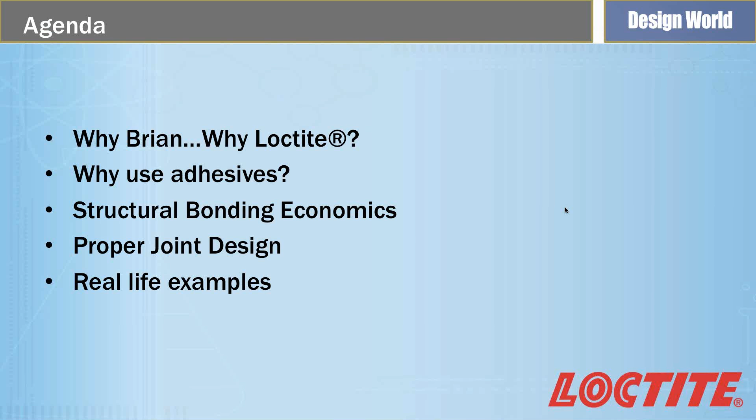So the agenda here: talk a little bit about why you should listen to me when I talk to you, and why Loctite is an excellent partner for structural adhesives. Talk about just in general why you'd want to use adhesives versus mechanical fasteners. We'll talk about structural bonding economics, proper joint design, and then wrap up with some actual real-life examples.

Why Loctite? Loctite, the brand, has been a trusted industry innovator since 1956 when Vernon Krieble developed and patented the first anaerobic thread locker. Since then, we've been on the cutting edge of adhesives, innovating new products like light cure silicones and many things. So we're continuously on the leading edge there. And Henkel is the largest adhesive company in the world. You may have caught me say Henkel earlier, and you see Loctite in the bottom corner. In 1997, Henkel bought out Loctite, the company, and Loctite is now a brand within Henkel, and Henkel is truly the world's largest adhesive company. So you're hearing this advice from the biggest adhesive company in the world, who has continuously come out with the latest and greatest products.

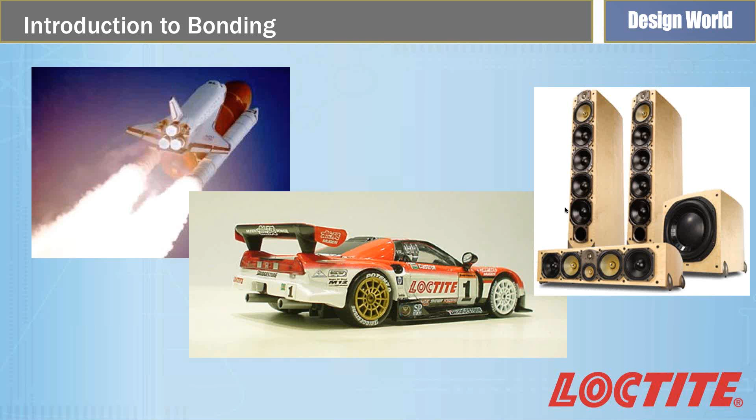In addition to that, adhesives have a level of elasticity, and as parts heat up and cool, as you drive that boom truck from Alaska down to Georgia, there's differences in thermal expansion in the materials that are going to apply stresses to the joint, and adhesives are able to absorb that stress and not degrade over time.

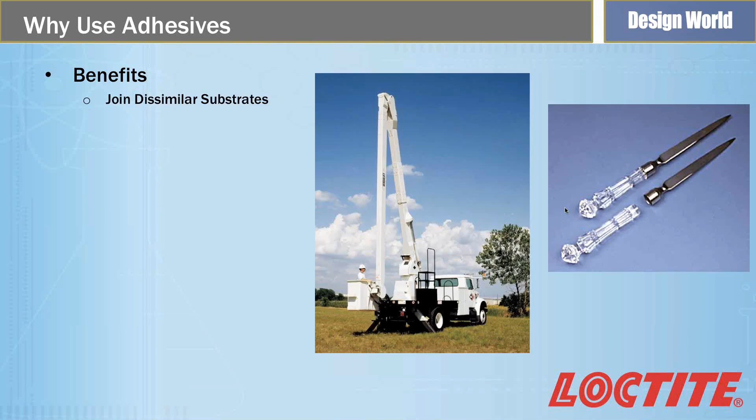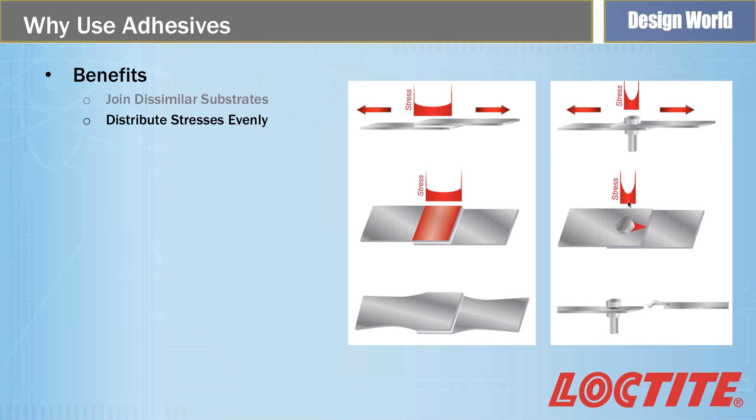We couldn't show it here today, but online there are a couple of videos that we've put together to show you the strength of bonds versus bolts, rivets, and spot welds. You can go onto this website, henkelna.com/loctitestructurals, and view all these videos to see the real-life testing of this distribution of stress.

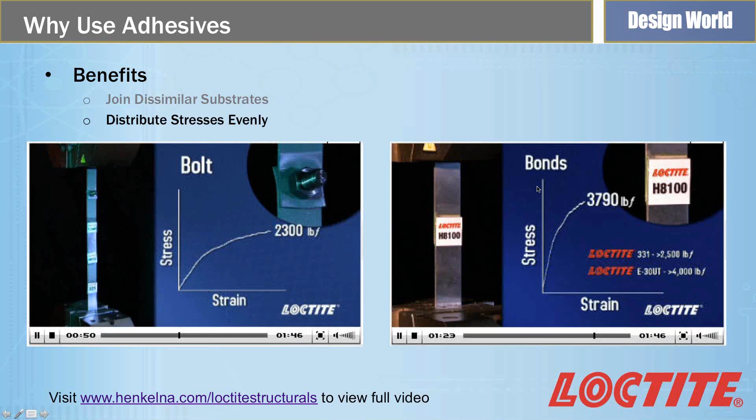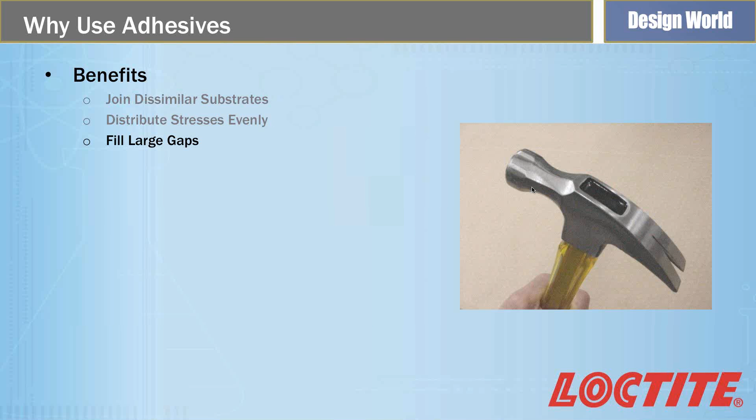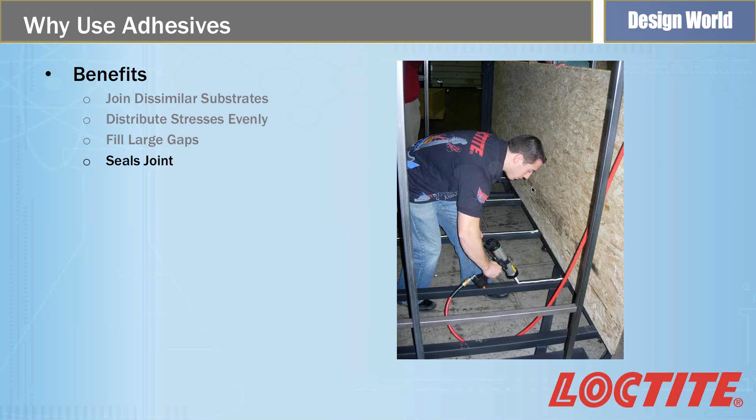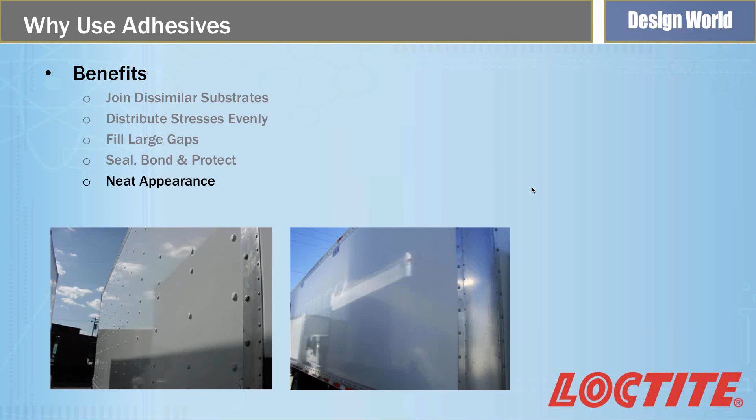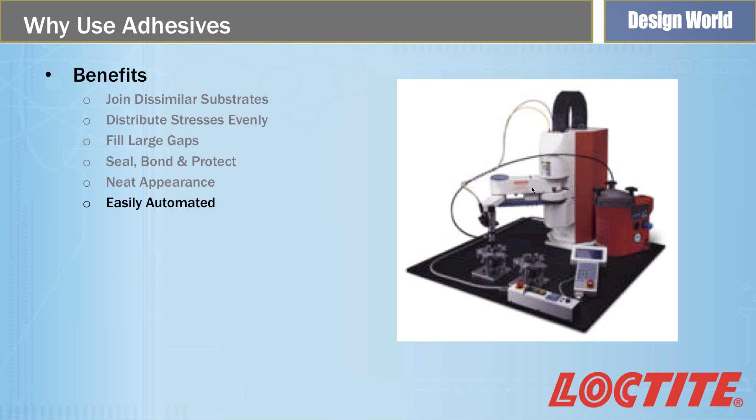So there you go, that's why you would choose adhesives, right? Well, I'm not going to completely ignore the considerations. It'd be easy for me to gloss over this part of the presentation, but I think it's important that we also talk about some of the reasons why you might not use adhesives. If you know these when you're doing your design, you can factor that into your thought process, and hopefully it makes it easier for you. So we'll spend a little time on some of the considerations of adhesives.

For one thing, they have to be cured. If you're welding or screwing or riveting, you just do it and it's done. Adhesives need to be cured, and that involves some type of process. On the top is a conveyor - some adhesives are light cured, and you have to spend money to buy this type of equipment and a process to get the part through there to cure it. On the bottom, we're showing a two-part adhesive, like an epoxy, where the parts are statically mixed through a mix nozzle and onto the part. So in some way, shape, or form, you're going to have to pick a curing method to make the adhesive cure on your part and give you the strength that you want.

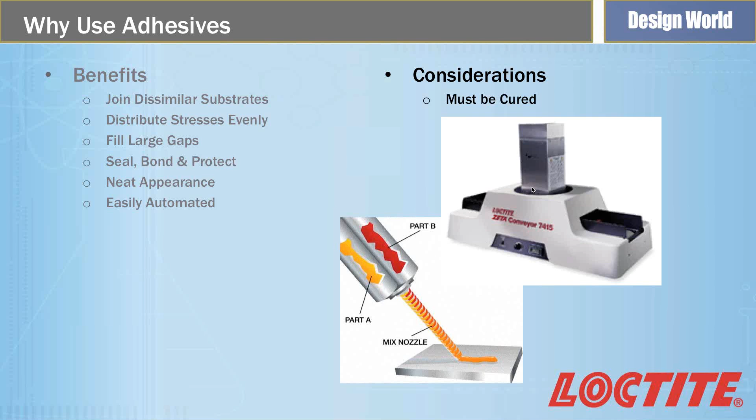That's one consideration. Kind of directly related to that is fixture time. All these adhesives are going to take a certain amount of time to fixture. In the case of light cure, it might be a matter of seconds. In the case of a two-part product that statically mixes, that might give you a matter of minutes for fixture time. But in either case, it's going to be some amount of time you have to let the product cure before you can pass it on in your assembly process. That's really one of the major considerations and differentiations between mechanical fastening methods and adhesives - fixture time.

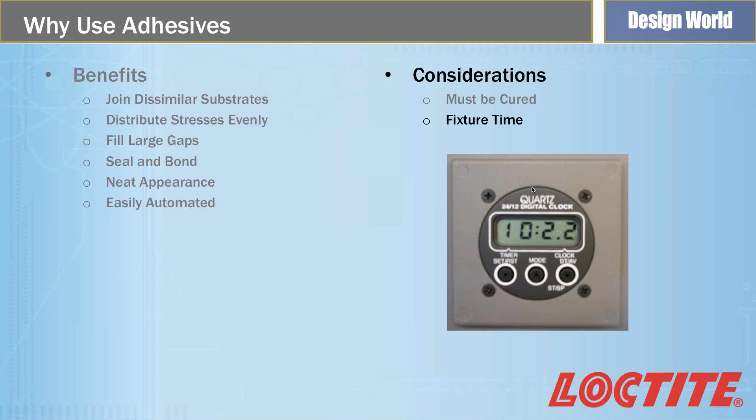Adhesives can be messy. If you knock over a box of bolts on your assembly floor, you can pick them up - it's real easy. If you spill adhesives on the floor, it's liquid, so you're going to have a mess. Now, there's clearly things you can do, like automating the assembly and making sure you have the right processes in place, but it is a consideration that adhesives can provide a messy work environment if not handled properly.

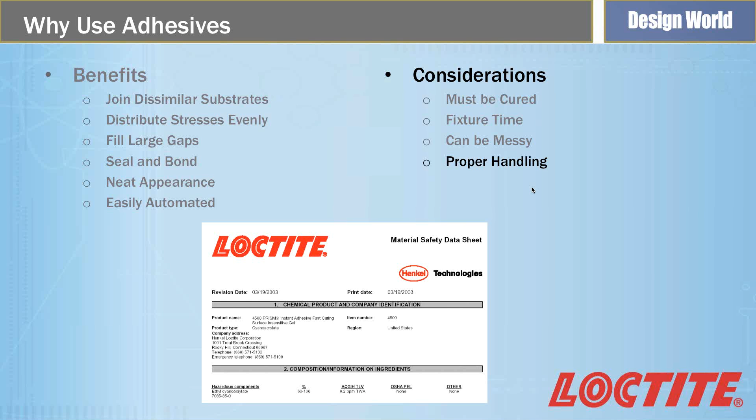And then to that point, proper handling. If it's the first adhesive you bring into your plant, or even the 50th, you're going to need to have the proper documentation in place and the proper training for your employees. This is something any adhesive supplier can provide you, but it is a consideration - you have to make sure that people know what they're using and are using it properly.

And lastly is my favorite one. I gave you the example of the trade show where I'm talking to this person, and we're talking for 10 or 15 minutes of me trying to convince them that structural adhesives are going to work - it's going to be super strong, it's going to last forever, it's going to be great. And then once I finally convince them, you know what their next question is? How do I get it apart? And obviously there are certain times when that is important. If there's a certain part of an assembly you have to get to for warranty work or replacement parts, this could be a potential consideration, and there are ways to do it.

Some elastomeric adhesives, like what your car windshield is bonded in with, you can use piano wire and cut it out with that. And even epoxies and acrylics, thermoset plastics, you can get those apart with heat. But it is a consideration - if you need to get it apart, you need to be picking a proper adhesive up front that's going to allow you to be able to do that.

So those are the major benefits and considerations to why using an adhesive. I probably could have done this all with one slide, because at the end of the day, from my experience working with different customers, you can spend all the time you want proving that adhesives are much, much stronger and all these different things.

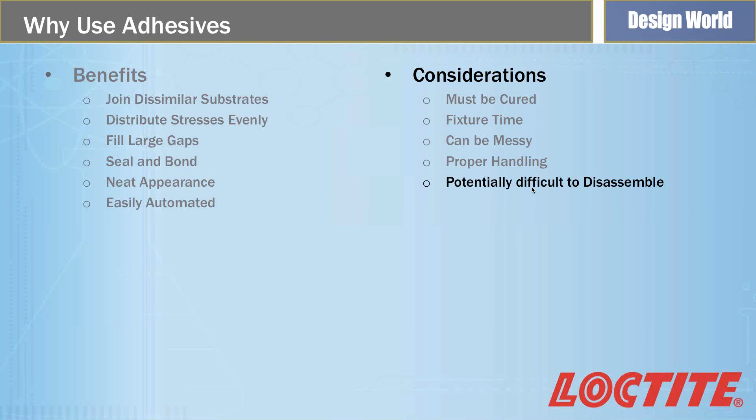But really what it all comes down to is saving money. At the end of the day, switching to structural adhesives is going to have to put more dollars in your pocket if you're going to do it. And the three major ways that's going to happen: either improve performance, they're going to distribute that load and give you a stronger final assembly, which is going to help you reduce scrap or warranty claims, and help you make more money.

It's going to be a faster process. It's going to reduce secondary operations that have to do with welding or other things. That's going to increase your throughput, so you're going to be able to sell more of what you make, or it's going to help you decrease your labor cost. So at the end of the day, the economics all come down to one thing: helping you save money.

So when we're looking at other methods, I've kind of divided it down to these three: you've got welding, you've got riveting, and fastening with nuts and bolts. And another thing I would throw in here too is like a double-sided adhesive tape. The major differentiator here, like I've talked about, would be fixture time. When you're welding, riveting, fastening, or using double-sided tape, you've got instant fixture.

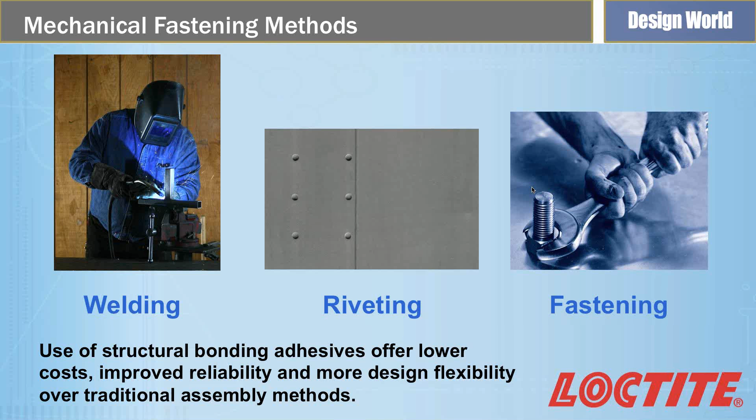And so that's a great thing in your manufacturing process. But there are some considerations. So I want to spend a little bit of time looking at these things side by side and the pros and the cons.

So when you talk about welding, the major pro is it's very, very strong. And if you're doing an overlap weld on a part, that is the strongest thing you can do. We've done a lot of testing, I'll show you some data later in this presentation about lap shear strength. And if you've read our white paper, you've already seen it. But if you're doing overlap welding, that is the strongest thing you can do.

There are some considerations with it. It's labor intensive. And I say that based on the fact that yeah, it takes a lot of time to do a weld, but it's also costly labor. Welding labor is in high demand. It's a very specialized skill, and they make a good living at what they do.

So it's expensive labor to do. In many cases, it distorts the substrate. In some applications this may not be a big deal, but on others, like at the stovetop we'll talk about later, there are actually secondary operations where people have to come back and grind the part, smooth it out, and those add cost and time to the operation. So that's something to consider.

We already talked about how you can't weld dissimilar metals, and also galvanic corrosion can occur in welded joints.

Mechanical fasteners, again, they're instant to develop your strength, and it's a well-known method. Between mechanical fasteners like rivets and screws and welds, this is what we were all taught in school. If you're a mechanical engineer, you spent a lot of your time learning how to design with these methods. I know I went to school to be an engineer, and I never once learned about adhesives. So these are very comfortable methods to work with, and they provide you instant strength.

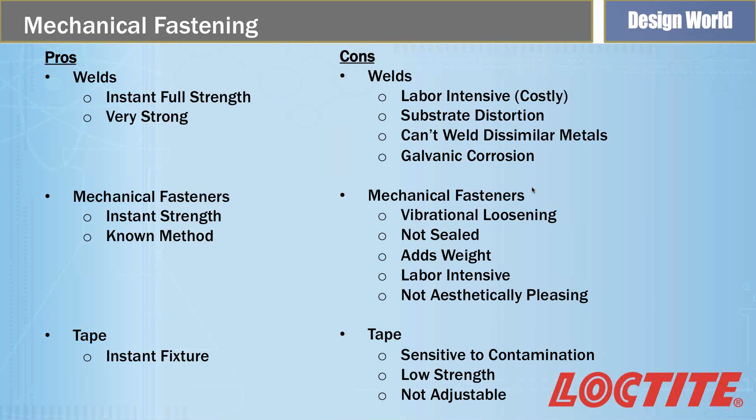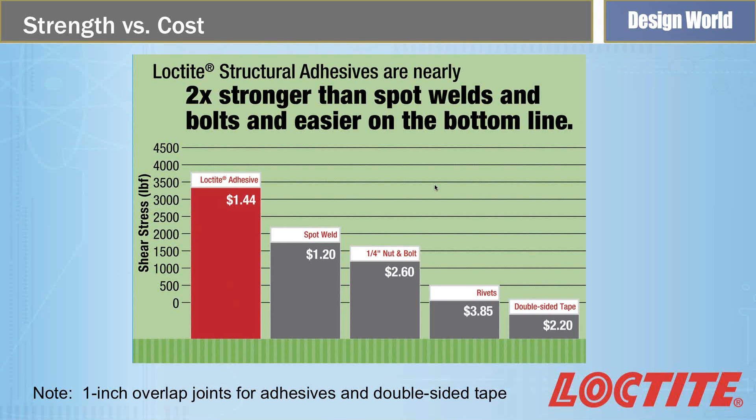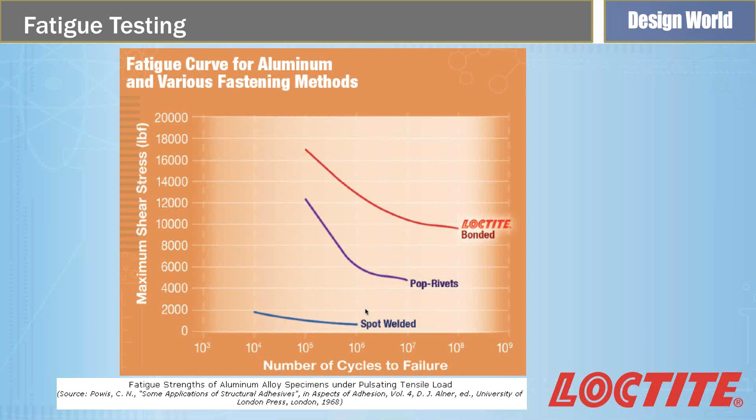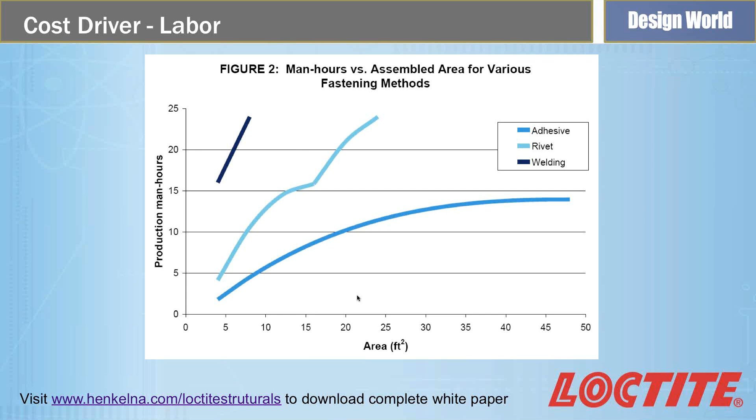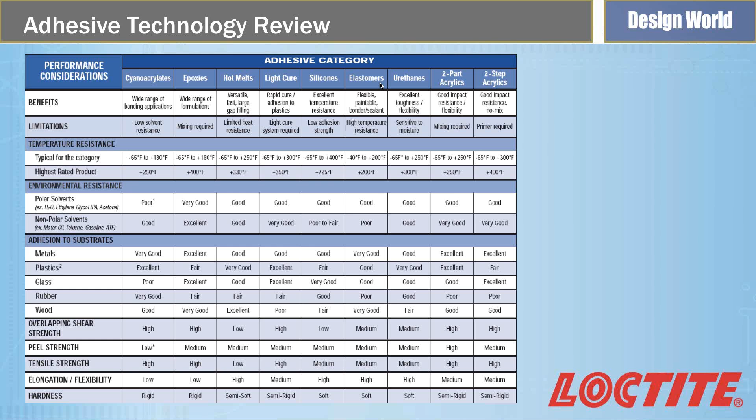So this is here to represent all the adhesive chemistries that are out there. When it comes down to it, there are really three major ones that we would consider structural: epoxies, two-part, and two-step acrylics. These are the chemistries that, for the most part, are giving you 3,000 to 5,000 psi of shear strength on steel, stainless steel, and aluminum. These are the ones that are going to be a direct replacement for welds and rivets and give you that great ultimate strength.

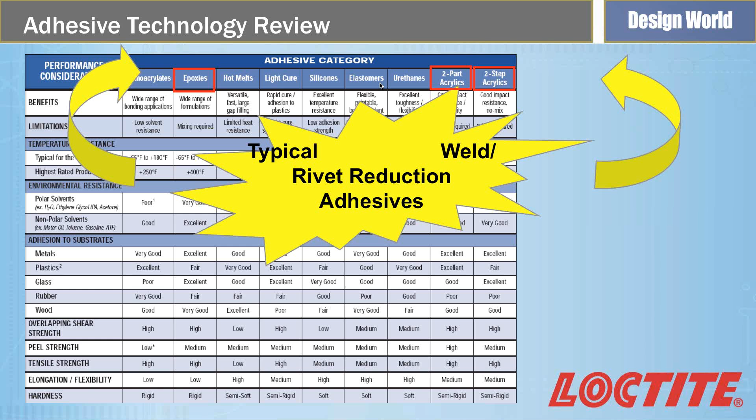The only other thing I'd add is that, depending on your application, some of these other chemistries can be structural adhesives too. Depending on the needs of your application, an elastomer or even a superglue might provide enough strength to be the only thing holding your part together. That's really how I would describe a structural adhesive - it's what I'm relying on to structurally hold my part together. So while these three are the ones you probably want to start with, any one of these can be a structural adhesive depending on your application.

I could have spent a lot of time talking about what makes those chemistries work and the chemistry behind them, but at the end of the day, that's our job - that's the adhesive manufacturer's job, to give you the right products to work for your assembly. You need to tell us what it is you're trying to do and what constraints you're working with. If you're interested, we could certainly come out and give you a much more in-depth look at the chemistry, but that's all I'm going to cover today.

The next thing I want to talk about briefly is joint design. This is probably a pretty basic review, but then I'm going to get into a little bit of what happens when you apply an adhesive force.

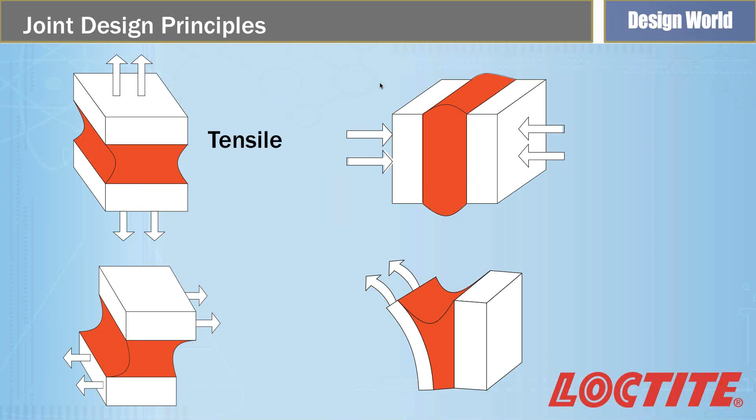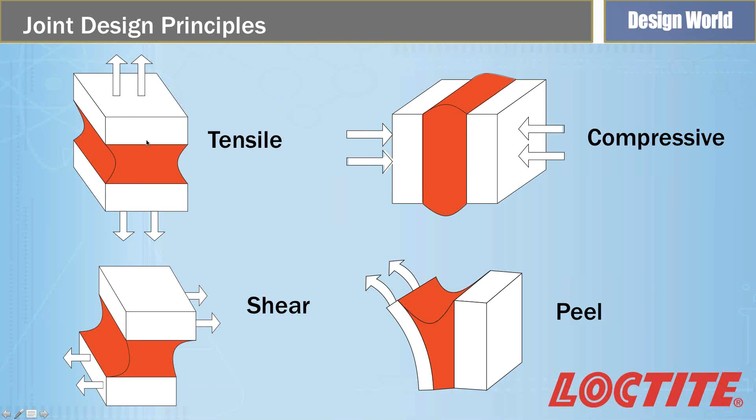The four major types of forces you can put on a joint are tensile, compressive, shear, and peel or cleavage. In these examples, the white is a block of substrate, like a metal, and the red is the adhesive - that'll be consistent as we go through. So these are the four major designs you can have, and we'll talk a little bit about what happens.

So if you're applying tensile strength, again, this white is the substrate, this red is the adhesive, and these arrows represent the force you're applying.

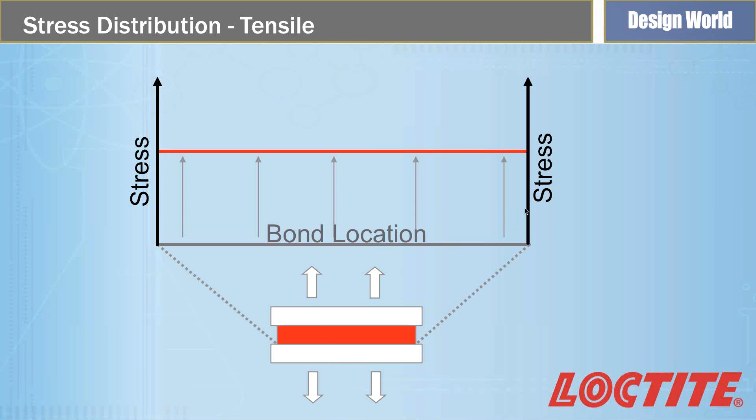So if you're applying a tensile strength across this entire bond area, which is blown up on top here, the stress is distributed completely evenly across the entire assembly. So this is an excellent force to design into your assembly in order to maximize the strength you can achieve with adhesives. Same thing with compression.

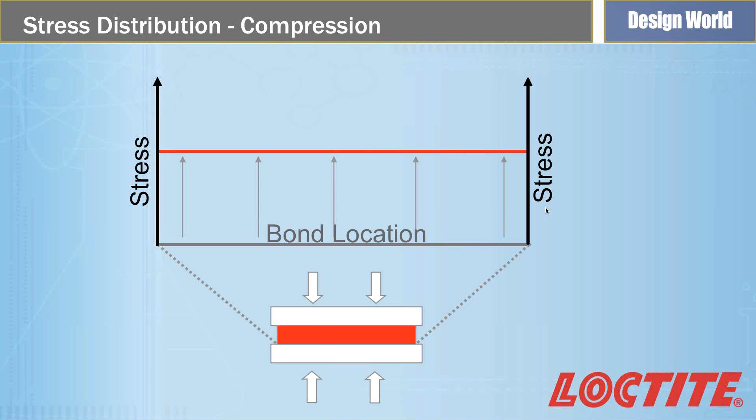Compression is actually even better. It's rare, you'll rarely ever see an adhesive fail in compression. So when possible, these are things you want to try and maximize in your design in order to increase your effectiveness. Shear strength is probably the next one.

So this is the next most aggressive stress, let's say, because you've created those slight stress concentrations at the leading edge. But there's things you can do, like increasing the width of your bond line that the force is applied to, in order to maximize the ultimate strength.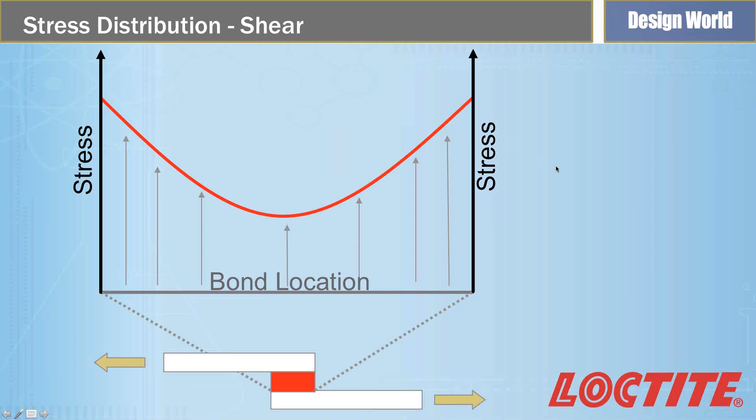And here's a little bit of why that happens. This is kind of an old graphic, not as nice as the other ones, but I think it really speaks to the point. In this case, this top set of rectangles is the substrate, this one in the middle is the adhesive, and this one on the bottom is the substrate again. So as you apply that shear force, you can see the adhesive starts to move.

And actually, if you look at this under very high-powered and close filming under an actual Instron, or when you're mechanically testing it, you'll actually see this little bit of substrate distortion happen, and that creates not a true distribution of stress. So in a perfect world, if that little distortion didn't happen, you probably would have perfect distribution of stress. Because it does, you get that concentrating at the leading edges, and this is why.

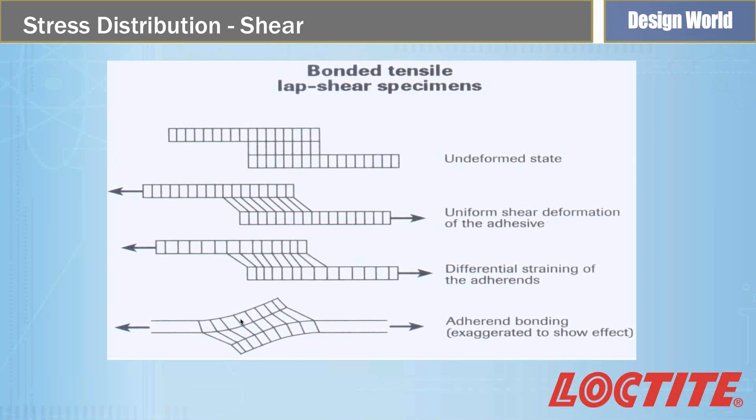Lastly is a peel or cleavage force, and this is really where you're pulling up one side and holding the other constant. The only difference between peel and cleavage is whether or not your substrates are rigid. If it's rigid, you have cleavage. If it's flexible, you have peel.

And the takeaway here is you don't want these. These are the most aggressive forces you can put on an adhesive because you have concentrated all the stress on that leading edge of the joint. And when it starts to fail, it just keeps moving its way down the end. So you definitely want to try and avoid cleavage and peel in your design if you can.

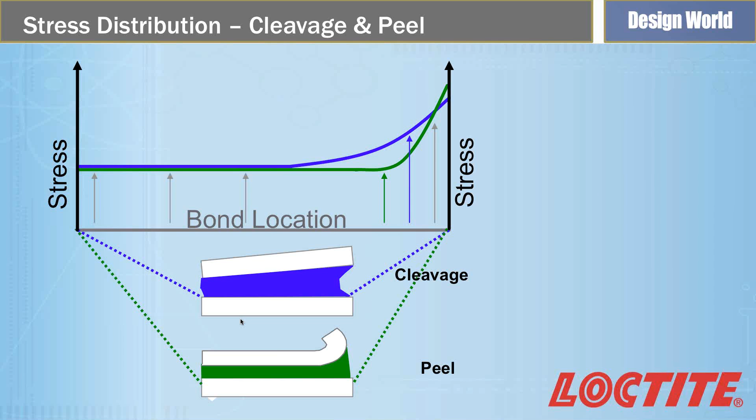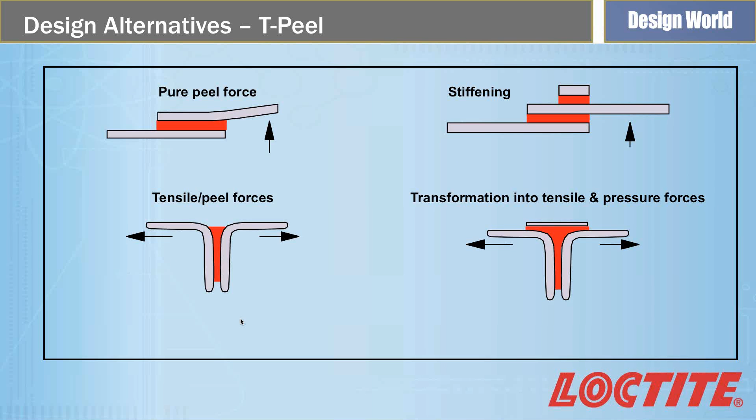So there's ways to do it. I've provided you guys with a couple of pretty simple design alternatives for shear here, and again for peel here. And these are just different ways you can design out some of these considerations if you have them. And again, you'll get a copy of this presentation, so no need to furiously jot all this down.

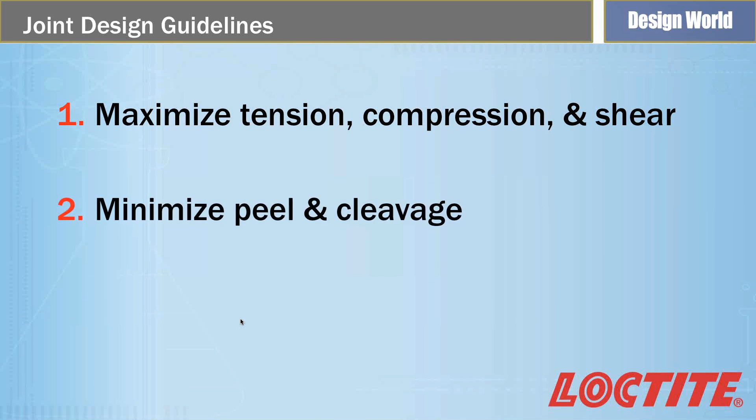So in summary, for joint design, you want to maximize tension, compression, and shear. Those are the ones that are going to give you the most ultimate strength out of your assembly. You want to minimize your peel and cleavage. That's focusing the stress on one point, and you're losing that benefit of the adhesive to be able to distribute the stress evenly.

And lastly, you want to increase your bond area. And remember, wider is better. Any way you can increase the bond area is going to help, but if you know the direction your stress is going to come from, if you can make that leading edge wider, it's going to give you a stronger ultimate assembly than if you make it longer. So those are the three major joint design guidelines when working with adhesives.

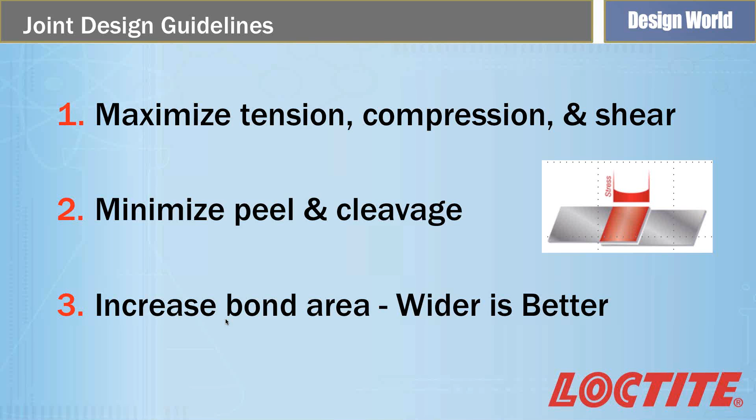So that's really all I had for joint design. And now I wanted to cover a couple of real-life examples. So basically, up front we talked about why adhesives. Then we covered some of the cost benefits and why they're going to save you money. We talked a little bit about joint design, and now this is really the, hey, here are the people who are actually doing this today. So this is meant to hopefully instill in you a little bit of confidence that I'm not on the leading edge of this cusp. People have been doing this for years, which they have.

These are a couple specific examples that I've handpicked for us to talk about today. The first one is the automotive impact test, used by one of the big three automakers to validate assembly methods specific to pillars, like your A-frame pillar and things like that.

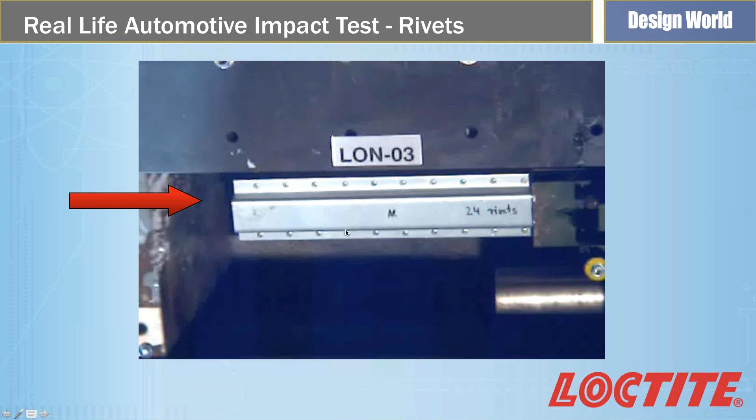This is not good. Basically, the rivets are popping out, so the assembly is no longer held together, and the failure mode is this very critical and acute bend of the part—it's not really absorbing the stress. Most of the stress is coming through into the back end, which is not what you want in a car crumple-type application. So this was their riveted panel.

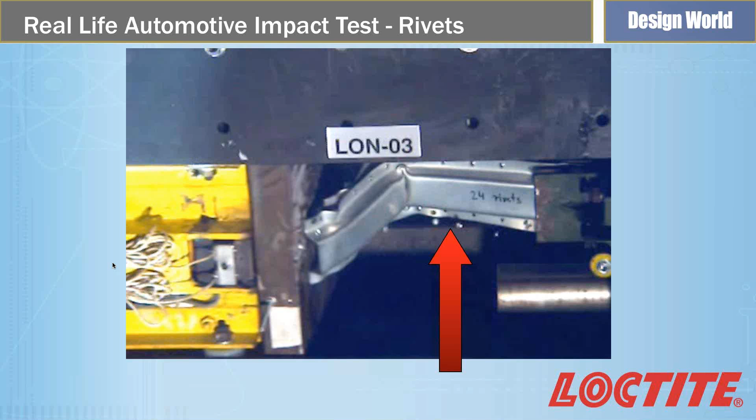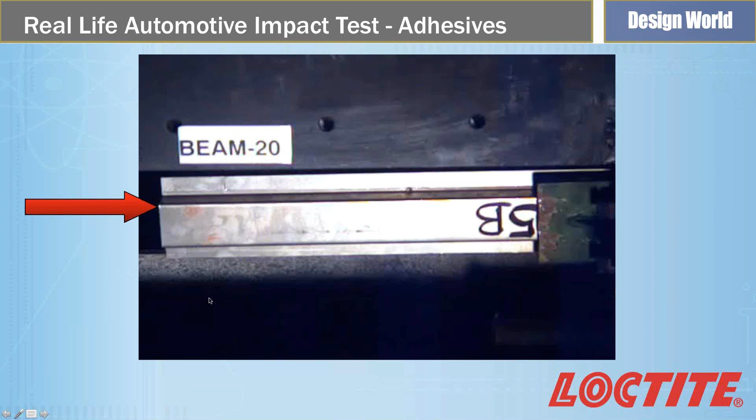The next one you're going to see is an adhesive bonded one. Same kind of application, except now these are bonded together with an epoxy—a heavily modified epoxy with very good impact resistance. Again, you'll see stress applied with an impact from the left-hand side, and we'll show you what happens. In this case, the adhesive joint is still staying together.

It hasn't failed, and what it's doing is crumpling—this is what creates that crumpling in the front of a car. The adhesive is absorbing that load and folding in on itself, due to the properties of the adhesive being able to absorb the load instead of concentrating it at rivets that pop out. This is one of the reasons why almost every car has a lot of adhesives in it—because of the major benefit of structural adhesives absorbing that impact load.

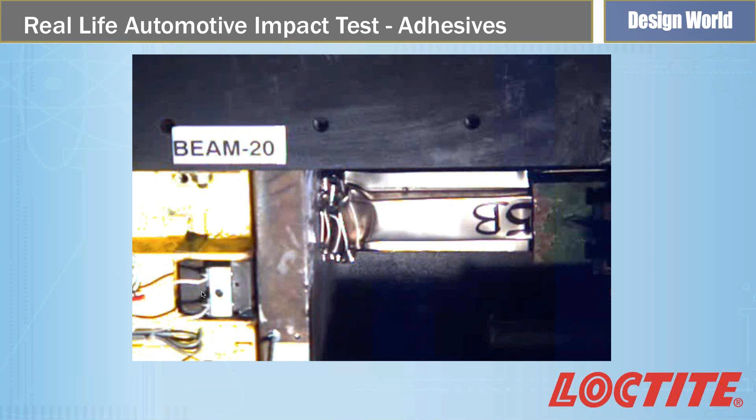Sticking with the automotive example but a little less abstract, here is a real-life application for Thomas Built Buses. We have agreement with them to share this story because it's a good thing for them—they actually have the safest school bus on the road, thanks to Henkel Loctite structural adhesives. These pictures are taken from an SAE case history that appeared in their magazine. Basically, they've eliminated the rivets that used to hold this assembly together, and are now using structural adhesive.

On the bottom, you can see it—this gray product that's hard to see because it's designed to match the frame itself, so squeeze-out on the inside doesn't show up as dramatically. The number one driver—decision drivers, not bus drivers—to make the switch was improved safety.

You saw in that first example all those rivets popping free, right? Picture this school bus with a bunch of people inside. If there was an impact and the substrate ripped like those rivets did and they came loose, that creates a safety hazard on the inside of the bus. So by bonding it, when you have an impact, the actual joints stay together—the metal bends and folds, but it does not break free from where it is bonded.

So you have this initial impact that's going to create something you don't want, but you're not going to compound that problem by having the substrate fail where these rivets and stresses are concentrated. That's why, by safety standards in North America, this is the safest bus out there. If you look at the next school bus you see go by, you might see that it's glued together—and that's the main reason why.

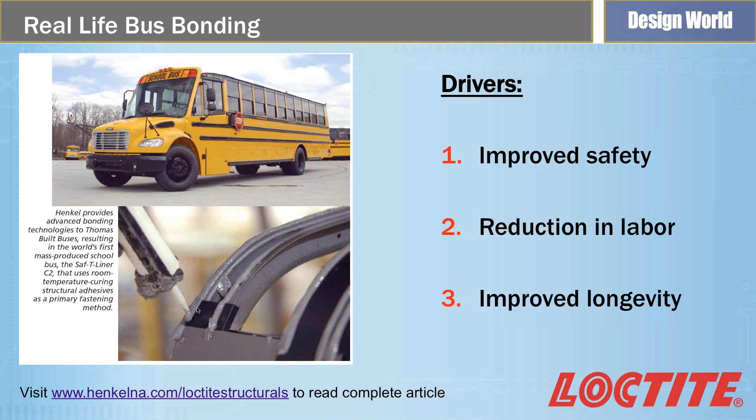The next thing is trailer bonding. In this case, on the bottom here, you see a Loctite trailer. We actually built this trailer, partnered with a manufacturer in New York, and built it all out of Loctite adhesive. There's no screws or fasteners on this thing, it's all glued together with Loctite products.

In this market, while some people might consider their Harley-Davidsons or their ATVs their kids or their toys, and might consider safety a big deal, the major driver for these guys is reduced labor cost. This is a highly cost-competitive market.

Being able to draw an adhesive bead, like you see this gentleman in the top left-hand corner doing, across that area in a fraction of the time it would have taken him to put in all the bolts, screws, and rivets, is the major reason why many of these guys have switched to adhesives. That also allows them to have faster throughput, so when things are going well, they can crank out trailers much faster.

And the improved aesthetics are a nice thing. Many end users like that smooth look, especially people who are going to do advertising like we've done on the side here. It's much nicer to have that smooth side to work on than one with screws and rivets all down it.

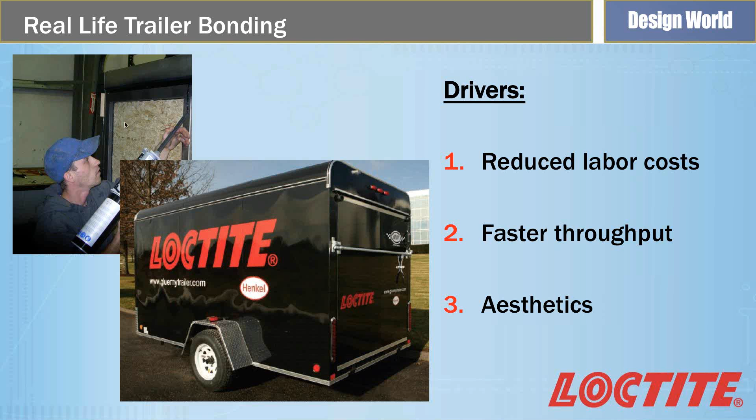For the last example, I noticed I had a lot of automotive type applications, so I went to something very different, which is stovetop bonding. The application for structural adhesives is actually underneath that range top, which is the stainless steel.

There's a bracket that they were welding on, which allowed them to fasten that top to the rest of the assembly. One of their biggest scrap issues in the plant was that when they'd weld it, you'd see an imperfection on top. They'd have to come back through, grind out that weld, and smooth it out to make it more aesthetically pleasing for the end user.

So the real driver to move to adhesives in this case was aesthetics. And when they didn't have the right aesthetics, they had to scrap the part.

That wasn't just due to the welding and grinding either. These parts came in with a nice blue plastic sheeting on top, and if you could leave that on after bonding the parts, the part could run through your whole plant protected from anything dinging or scratching it along the way. But you had to peel that off in order to weld the spot.

So it wasn't only an issue of the welding creating aesthetic issues, it was also a process problem - once you peel that sheet off, you might ding it somewhere down the line, and then it became scrap. Stainless steel tops are not cheap, so for these guys that was a major driver, and it also eliminated the extra grinding processing step.

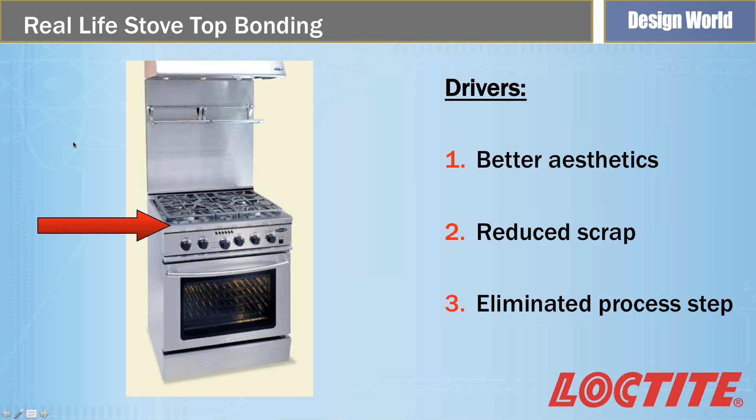For the real last one - I put 'real life' in quotes because I don't know when this might actually be a pertinent application for you - in an effort to show the impact resistance of adhesives versus tape versus mechanical fasteners, we put together aluminum panels. Right down the center, there's two aluminum panels assembled together, in this case screwed together, and we shot baseballs at it at the batting cage as our impact test. It's a fun example showing how much more impact-resistant adhesives can be versus some of these traditional methods.

So if you go to the website, henkelna.com/loctitestructurals, you can see that there.

So in summary, why would you use adhesives? It's the cost savings - improved strength, aesthetics, and reduced labor are the drivers, but they all add up to putting more money in your pocket, and that's the important thing. That's the number one reason to use adhesives. We'll also cover a little bit of joint design.

You want to maximize tensile, compression and shear, and minimize cleavage and peel. That's going to help you have a better joint design, which is going to be more conducive for adhesive to work.

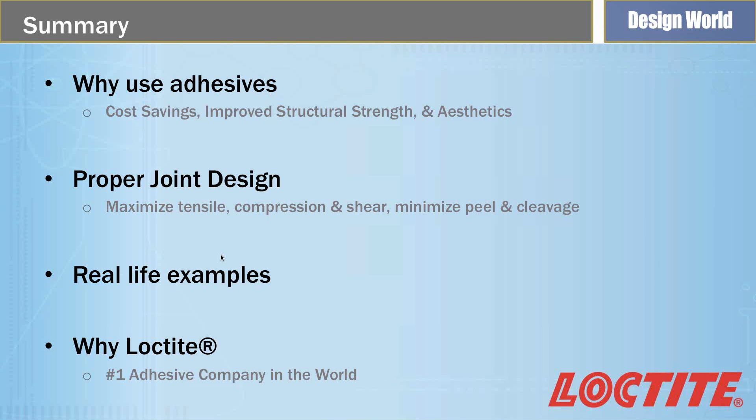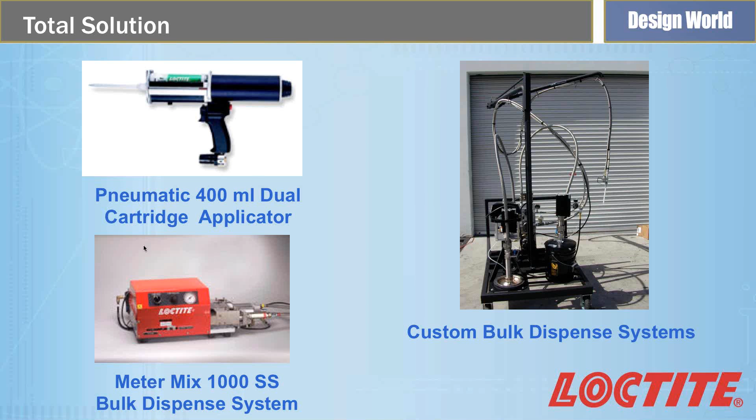We covered some real-life examples, and talked about why Loctite, being the number one adhesive company in the world, is the main reason you'd want to partner with us. We talked about equipment: Loctite offers a full line from large bulk dispensing systems down to manual, so we can provide a total solution. You're not just going to get the adhesive thrown over the fence and have to figure it out yourself. We'd like to partner with you.

Another thing - if after today you have questions about your applications, you can get one-on-one support at 1-800-LOCTITE. The beautiful thing with this number is you're actually calling people who sit right outside my door and spend half their time in the lab working on customer parts and applications. They're not speaking from a cheat sheet off a binder - these are people who really know what they're talking about.

You can also go to the website, which I mentioned. On there you'll find case histories - more real-life examples to help build confidence - some of the videos I talked about, and also the white paper, 'The Hidden Cost of Instant,' which covers detailed testing and background work that went into creating this presentation.

If you're more of a reader, check out our design guides for bonding metals and plastics - they give a great feel for shear strength of varying adhesives on different substrates. It's a great tool to help get you in the right ballpark if you want to try something on your own, or you can always give us a call and we can help you out.

So that's really all I had for today. Hopefully you've learned something, and I'd love to answer any questions you may have at this time.